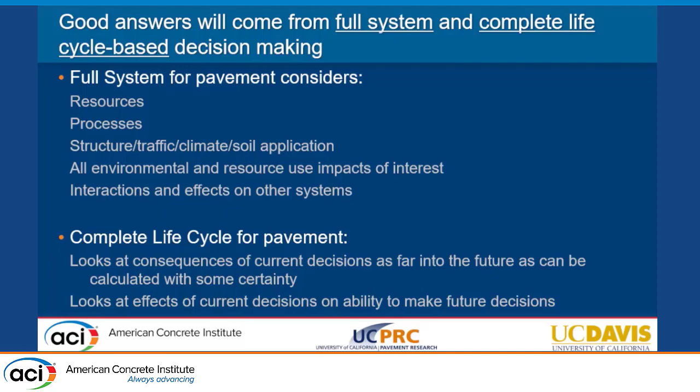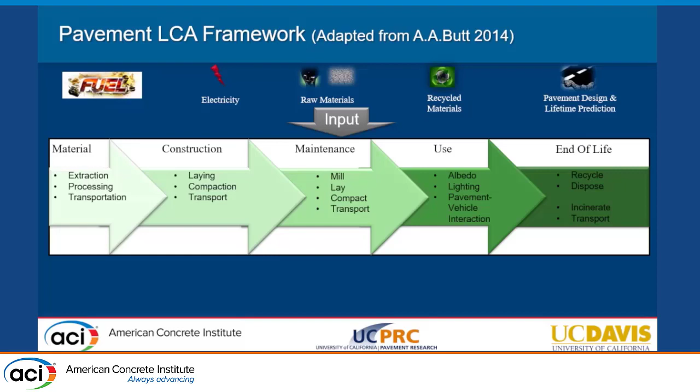And as an output, of course, we get our pavement as a whole, but we are also getting airborne, waterborne, landborne emissions. We may get recyclable materials, and in some cases, you might get energy as well.

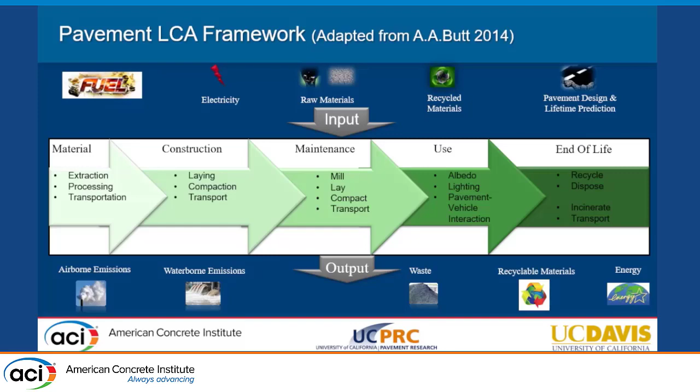So for the last decade, the Pavement Research Center has been working quite a lot on developing models, collecting data, and our end product is the Environmental Lifecycle Assessment for Pavements tool. It's a web-based transport infrastructure LCA tool. The reason we call it transport infrastructure is right now we have roads, but we are looking into getting the bridges in this tool as well.

The tool is capable to model the life cycle of any pavement project. The database library is developed based on the California-specific inventories. And this includes the materials and mixes, construction equipment and activities, transportation modes, as well as the use stage impacts.

And we do have IRI equations, the excess fuel consumption due to roughness equations, and of course you need fuel to move your vehicle on top of the pavement. And then we have end of life scenarios that you can also evaluate. There are total 18 different impact categories that can be quantified in there. That's TRACI plus the 15804 energy, renewable and non-renewable energy impacts.

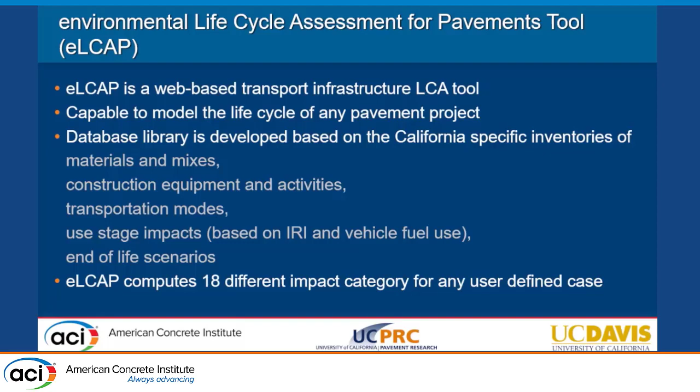We have had 2 sessions of getting our data and models reviewed by 3 external reviewers who are well known in the pavement world here, and they do have enough knowledge of LCA.

All this information that I'm presenting, by the way, is available in the papers that we have published, the Caltrans reports that we have published, and the references will be there in one of the slides at the end, which you can download once you get the handouts for these presentations.

So when we started developing this model back in early 2010, the only well-developed databases that were available were mostly proprietary. You were either looking at SimaPro, ecoinvent, or GaBi if you really wanted your data sets to be much closer to completeness. But now, because of the federal LCA Commons effort, we do have publicly available data.

So because we were developing it for Caltrans early in 2015, we had a license agreement with thinkstep, who developed GaBi, now owned by Sphera, by the way. And the license only allows Caltrans and UC Davis people to use the tool.

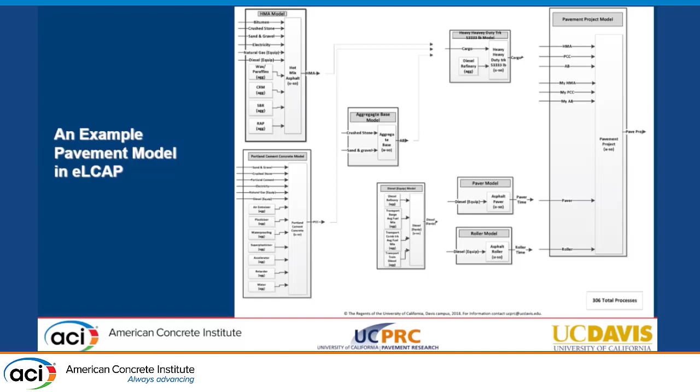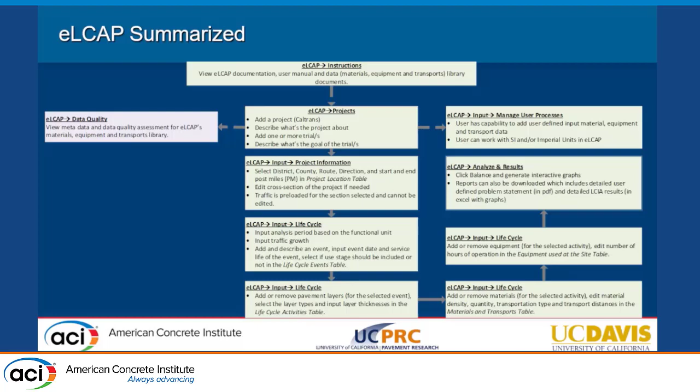The whole process of running eLCAP is also summarized in a flow diagram there as well. Of course, I understand that you are not allowed to use it right now, but as I said, by end of this year or early next year, we do hope that this is going to get into the hands of other people as well. Our databases, as I informed earlier, were critically reviewed by 3 external reviewers, and the results were published along with the review process reports in Caltrans reports.

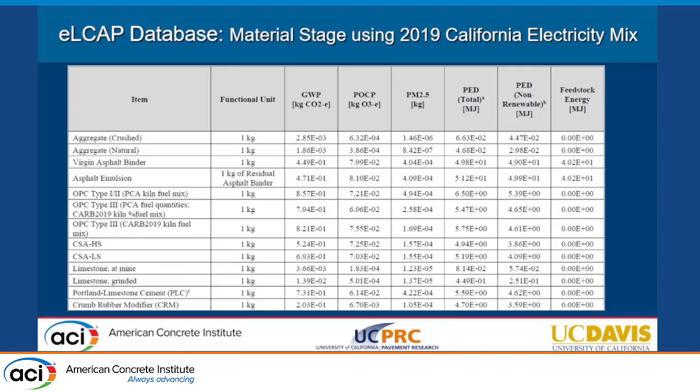Some examples of these impacts are shown in this table. One of the interesting ones that you would probably want to see here is the comparison of different kinds of cements that are available, the global warming potential for different cement types. PCA has published 2 EPDs back in 2016 and 21. This is what their number looks like.

What we did was we went back to the LCA of cement reports, took out some of the kiln data, and used that with the electricity mix and the fuel mixes of California. And then we recalculated some of these values. All the assumptions for all these different cement types, how the calculations were done, the models themselves, are all available in that report if you are interested to look at. We also have a Portland limestone cement inventory there as well, in case somebody is interested to look at this material.

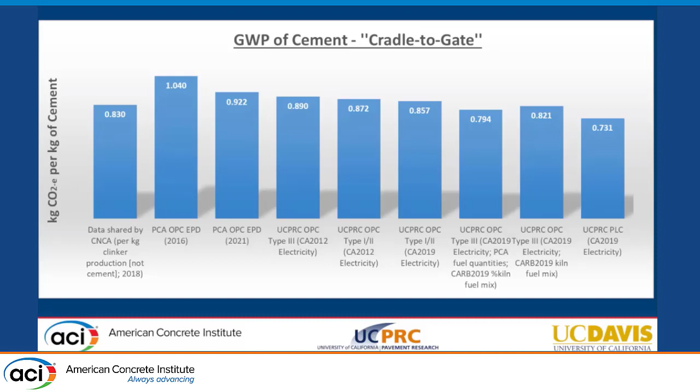For anybody to have confidence in the data, you have to have a properly defined data quality assessment method. We were also part of the LCA PAVE development team. That's the Federal Highways Excel-based LCA tool. And this was one of our tasks, where we were supposed to come up with the data quality assessment method. So we used the US Environmental Protection Agency's report. They had a very basic data quality matrix developed, but we made it applicable for our product use as well.

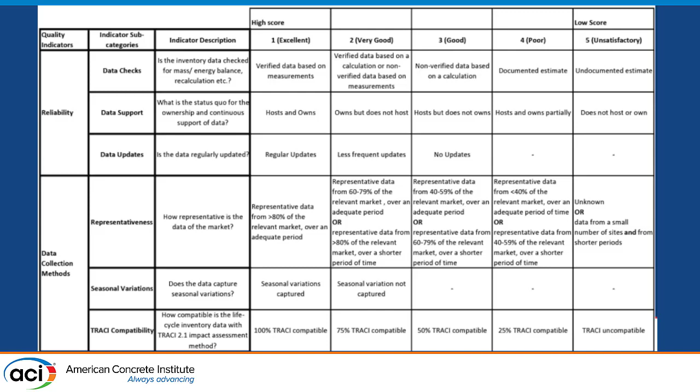So we have the data quality indicators right there on the left. We have sub-indicators there as well. Those indicators are described briefly, and then we have the scoring system. So in eLCAP, and even in the report, we have done this data quality assessment for any data that we are using. If there is none available by the producer, we go back and check and see if we are able to score that data. Based on this, one could have a little bit of confidence in what data they are using to do their evaluation.

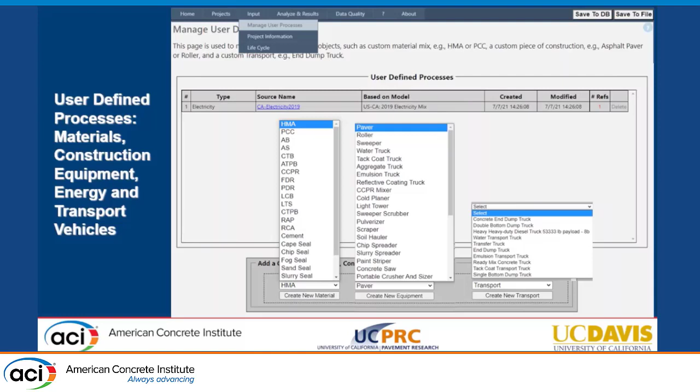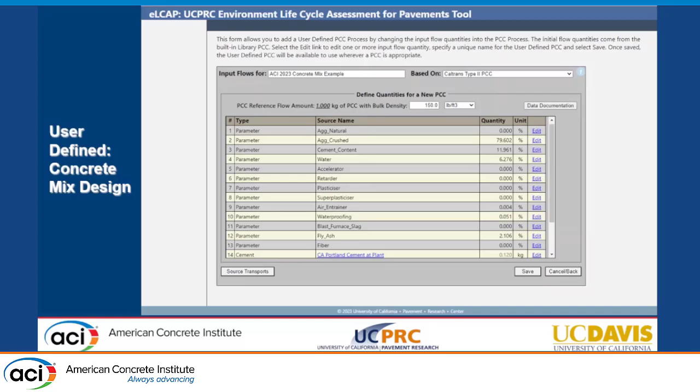An example: you can create your own concrete mix designs in there as well. You have all those ingredients. You can change the mix design based on percentage mass, and you can also change the energy values for this as well. And the program is going to be able to quantify the impacts for you.

We do have reclaimed asphalt pavement and recycled concrete aggregate databases there as well. Instead of adding those materials just as is, we have different scenarios that are defined, and a user can select the scenario he has for his particular project. Scenario means: is it in-place recycling? Are we talking about getting the material from stockpiles at a plant or at a different location, and bringing it into your own plant and creating your mixes? And for each of these scenarios, there is certain equipment that you need as well, and they are all defined in the report.

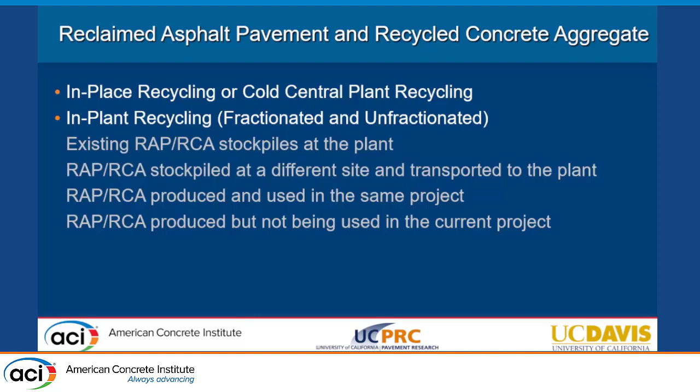There are several construction activities. A few of them I have listed there. You can have HMA pavements, JPCP, CRCP, aggregate bases, lean aggregate base, cement lime treated bases, and several others. You can also look at grinding, milling asphalt pavements, and all this could be done using the tool.

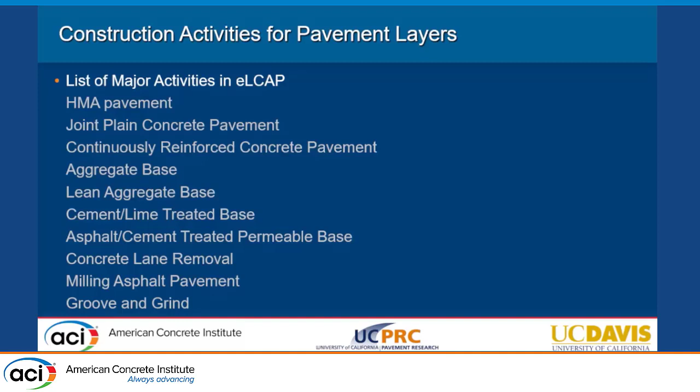We have also linked the location database of Caltrans as well as the traffic database of Caltrans to our tool. So the minimum information needed to run eLCAP is where your project is. Once you know where your project is, the traffic is going to be preloaded because we know what the traffic is there. The only other information you need is what are you doing? Are you adding a layer or removing a layer? And what does your design look like. You just put in this minimum information and you are able to quantify the impacts.

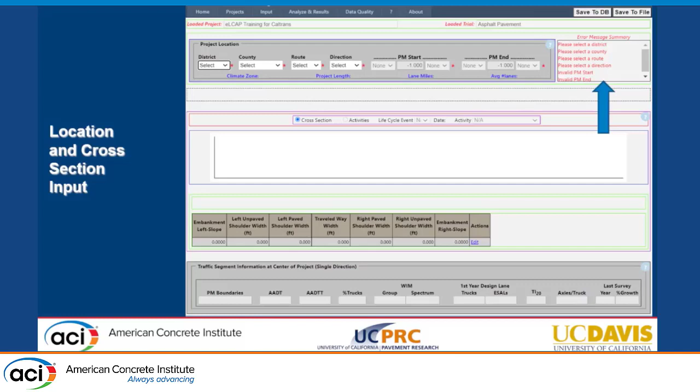Of course, if you are an advanced user, you can create your own mixes, create your own materials, and do a lot more. So I have done this example where I have put a location in there, and it shows me that there are 2 lanes in this direction at this location, and this is how the traffic looks. And in case you are interested to change this scenario, you can even edit and change the cross-section. You can add paved shoulders, unpaved shoulders, whatever your project looks like.

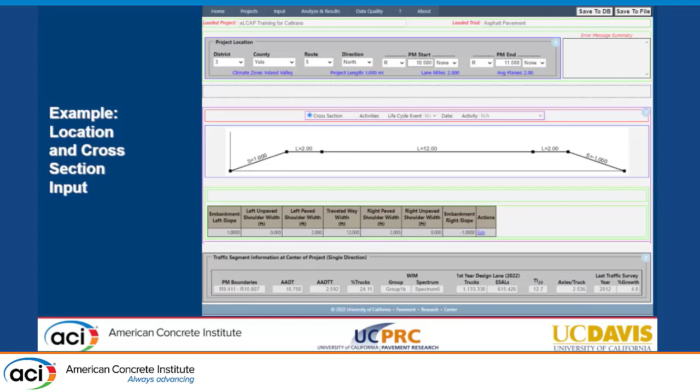There are several tables that are available in there. These are the input tables. As I said, the minimum information required is, what are you doing? Are you constructing a new pavement? Are you doing a maintenance? When is that event occurring? And what does your initial IRI look like?

And then whether you are adding a layer, or you are removing a layer, or you're grinding. Whatever activity you are doing needs to go in there, and you define your thickness, the materials and transportation and equipment to build or remove that layer automatically appears here in the other tables.

And the default values of how much time a certain equipment needs to run to build that pavement, or what is the default distance to getting the materials to the site, maybe to the plant, all those assumptions have actually already been filled in for you if you are a beginner. If, as I said, you're an advanced user, you can change anything here. Using the same information, you can design your case, whatever you have.

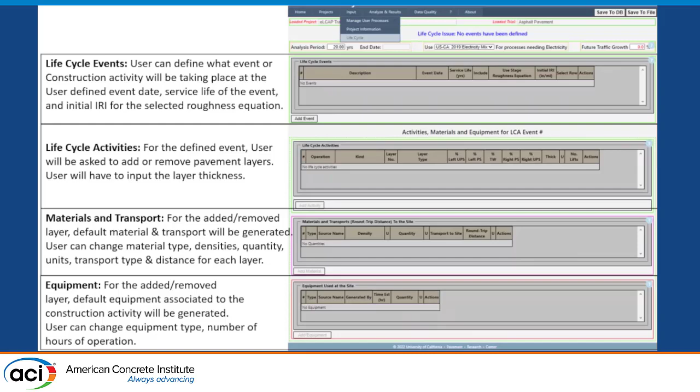Another quick example is an example of cradle to laid, where I try to do a JPCP and a CRCP pavement. So you can do comparisons in eLCAP as well if you have 2 designs. Of course, the analysis period and the location have to be the same. If you have those 2 things the same, those checks are okayed, you can actually do the comparisons for 2 designs, 2 different pavements as well.

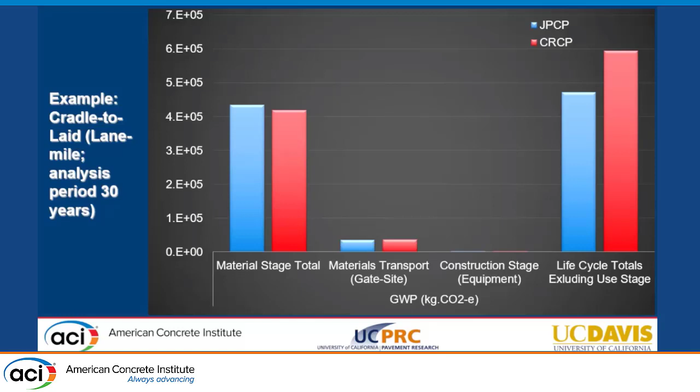Another example I would like to show here is, this is also the outputs, by the way, from eLCAP. So you can also do a rehab activity, then you have a preservation, another rehab, another preservation. You can compare these different scenarios with other scenarios that you might have. So in this particular case, I have rehabilitation and preservation cycles for 40 years. And then I have rehabilitation only for 40 years. So these kinds of analysis can actually be very well done in eLCAP.

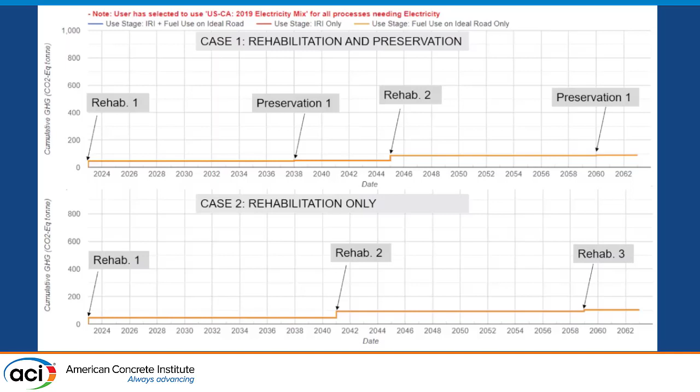This is an interesting slide and a bit controversial. On the y-axis, you see cumulative greenhouse gas emissions, and on the x-axis, you have time. So what I'm trying to show here is what is seen in a low traffic scenario. If you see this circle, there is some material, construction and transportation activity. That's a vertical line on the y-axis. So that's an event that has happened.

And then for the next 5 years, you have traffic running on this pavement. So you see 3 curves here. The yellow one is, of course, the fuel you need to push your vehicle on the pavement. But then you have the pavement effect, pavement roughness, that is causing excess fuel consumption. You add these together, you get the total use stage emissions. What is interesting here is that when you take the percentages, the material, construction, and equipment all make 0.1% of the total. The use stage is almost 96%, and 3% comes from the roughness.

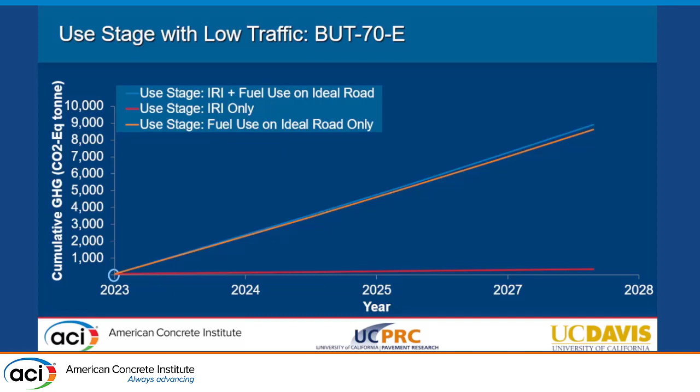So life cycle assessment can be used to quantify environmental impacts. There is guidance available in Federal Highway documents, and we have state documents as well, to develop LCA frameworks. We are at a stage where we are able to develop tools. I mentioned LCA Pave for Federal Highways. That's a tool that is available you can use. And we want this tool to soon come into your hands as well. But right now, at Caltrans and UC Davis, this tool is being used.

Then we have a very important point here: if we get primary data from the industry, and industry starts helping make this data available, our LCAs could have meaningful and impactful results.